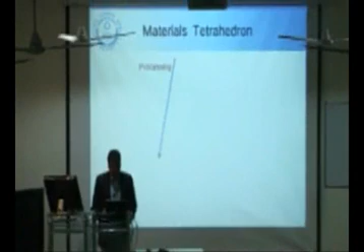So this talk is quite different from the content that is already going into the school. It's severe plastic deformation, pushing the limits of strength. Our idea is very simple: we want novel materials for novel applications.

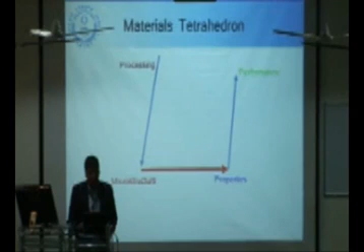So the main criteria is to enhance the strength. The second criteria is that it's a multiple objective problem, that is, we have to minimize the weight of the materials. So there's a materials tetrahedron. If you want to enhance the performance, we have to change the properties.

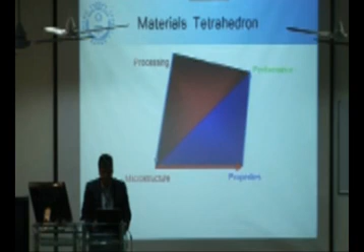If you want to change the properties, we have to change the microstructure. And if you want to change the microstructure of an already naturally available material, we have to go for some enhanced processing techniques. So that's where we come in. Our research is into the novel processing techniques by which we can change the microstructure. If we are able to change the microstructure, we will be able to change the properties, and vis-a-vis the performance will be changed. So, microstructure.

This can be done by two main approaches, either top-down or bottom-up. Our work falls under the top-down approach, where we take a bulk material and try to minimize the microstructure of the material. As I told you, if we are able to change the microstructure, we can enhance the properties.

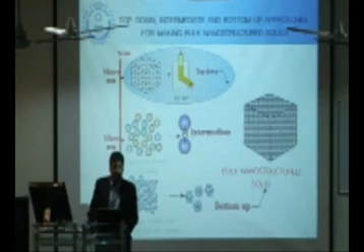So what we are trying to do is severe plastic deformation. Already many of our devices and metal forming industries use plastic deformation. The problem with plastic deformation is that change in shape takes place. So when the change in shape is taking place, we have a limitation in applying plastic deformation to the material.

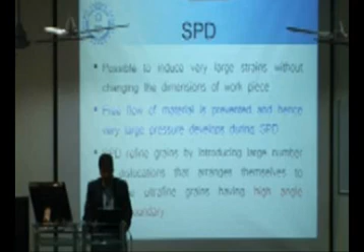So here we come to severe plastic deformation, by which we can change the microstructure. SPD refines grains by introducing a large number of dislocations that arrange themselves to produce ultra fine grains having high angle grain boundaries.

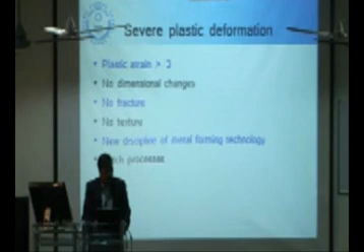What we can achieve by severe plastic deformation is plastic strain of the order greater than 3, no dimensional changes, no fracture, no texture - a new discipline of metal forming technology. But right now it is a batch process.

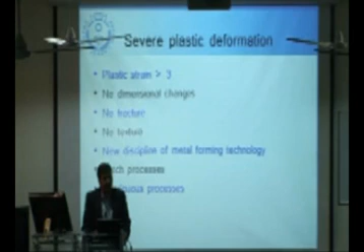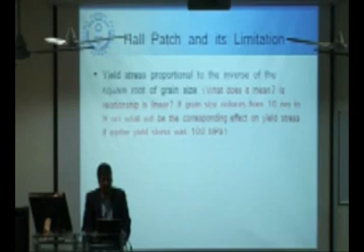What we are aiming at is to develop a continuous process in which we can apply this severe plastic deformation. This entire work is based on the Hall-Petch relationship, which states that if we are able to minimize the grain size, there will be an increase in the yield stress.

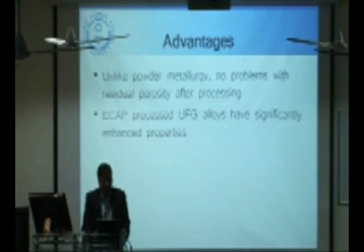So the advantages are: unlike powder metallurgy in the bottom-up approach, there are no problems with residual porosity after processing. ECAP processed UFG alloys have significantly enhanced properties. Multiple passes through ECAP are possible, since there is no change in cross-section.

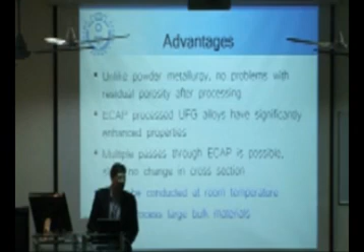Multiple passes are not possible in normal plastic deformation techniques. And most importantly, it can be conducted at room temperature, and large bulk samples are possible, which are not possible in the bottom-up approach.

So our work falls under these ultra-fine metals at the centers. In the conventional metal forming process, we take a coarse grain metal and do the traditional mechanism of plastic deformation - intensive strain hardening takes place. But as I said earlier, shape change takes place.

But in our case, we are doing little work hardening, while more strain is being introduced, and we are able to reduce the microstructure without changing the shape of the samples.

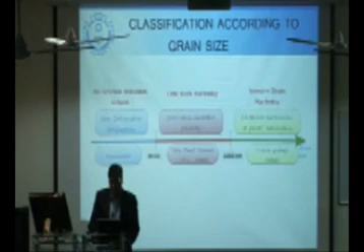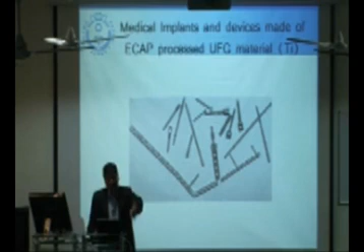The best application of this material produced by this technique is in medical implants, because in medical implants, weight has to be minimized and strength has to be increased. If we use metal processed by SPD, a good amount of weight can be reduced. The second application is in aerospace.

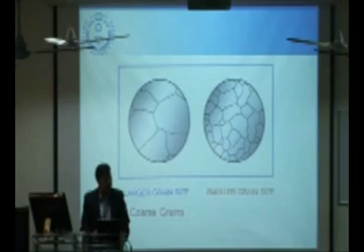So the idea is this: we are taking a coarse grain material and converting it into a smaller grain size. Our aim is to reduce the grain size over time without reducing the cross section.

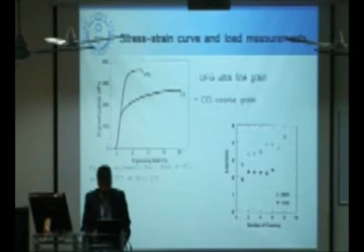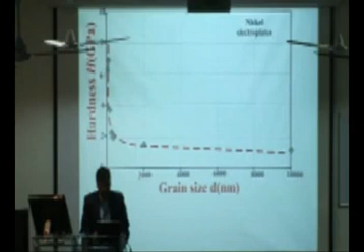These are some references which convey that ultra fine grain metal has got high yield strength as compared to coarse grain metals. As the grain size is reducing, hardness is increasing. These are well established references just to convey that as the grain size is reduced, hardness increases. This is for nickel, this is for copper.

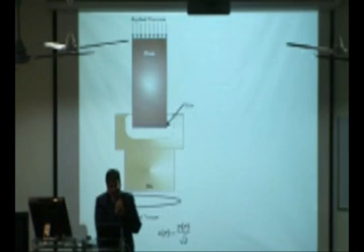Now these are the different severe plastic deformation techniques. This is high pressure torsion. In this process, only coin-size samples are taken and high strain is introduced. So the microstructure changes, and the second thing is that no cross section is changing. But this particular technique is limited to small samples only.

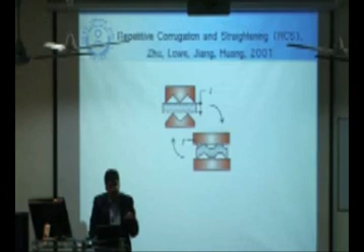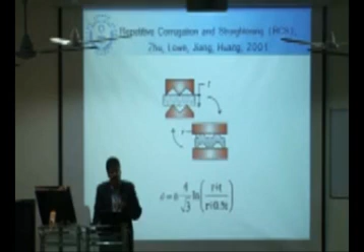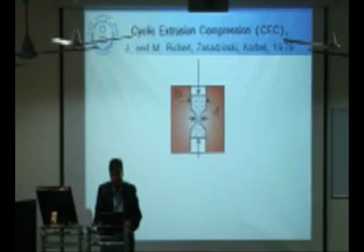This is the working of high pressure torsion. Then we have one more technique, repetitive corrugation straightening. This application is only possible for small sheet samples, where you are straightening, then corrugating, then straightening again. So over time the microstructure gets refined. Then we have cyclic extrusion compression, again with very small samples, and it is a batch process. So grain size refines as you change its deformation.

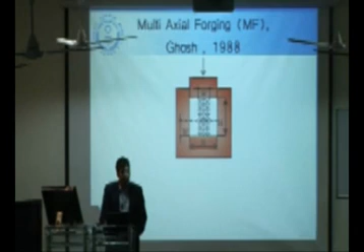Then we have multi-axial forging, which is a clumsy process because multiple blows are required. High pressure torsion I already discussed.

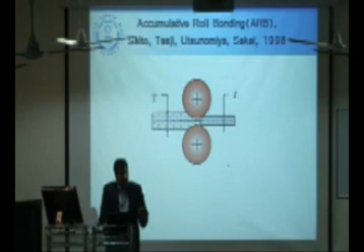Then for long samples you can take accumulative roll bonding, the ARB technique developed in Japan. Over time this works, but again it has a limitation: only up to a certain limit can the deformation be applied.

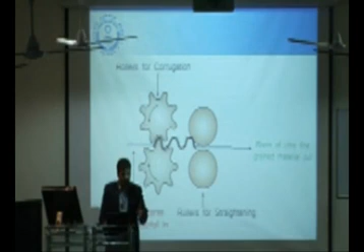Then there's repetitive corrugation straightening, which has been enhanced into a continuous process. But again, sheet requirement is very limited. As I told you, in medical implants you don't require sheets, and even in aerospace applications you don't require sheets.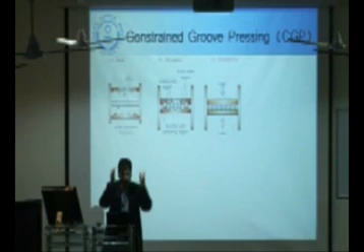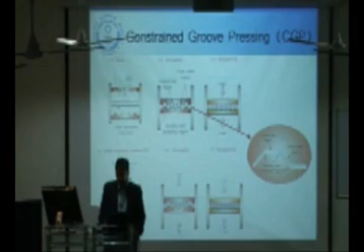Then this is constrained groove pressing, meaning the sample is constrained from all four sides and then deformation is applied. By that you are able to refine the grain size. But in this case, we don't get a uniform grain structure throughout the sample. So this was constrained groove pressing.

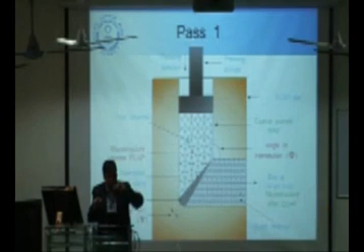Now comes the process on which we are working, and most of the community is working, that is ECAP, equal channel angular pressing. Most of the disadvantages of earlier techniques that I showed you—small samples in HPT, sheets in RCS—are addressed here, because very high strain is introduced in this area. You put one coarse grained sample in, and immediately you push it through the equal channel, which is the same size throughout.

So when it takes a turn, there is a good amount of change in microstructure, and second, there is no change in the cross section. This particular process can be repeated again and again because there is no change in cross section.

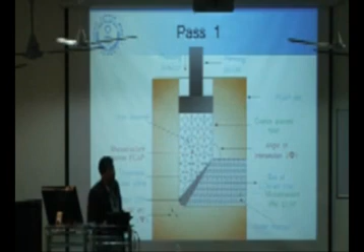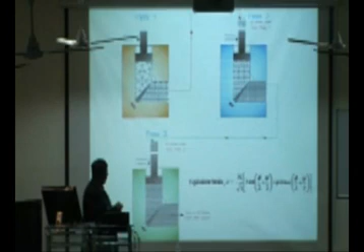These are some formulations on which this particular process depends. So a number of passes can be done: the billet is refined, then the same billet is taken and further refined, then taken again and further refined. In this way this can be done n number of times.

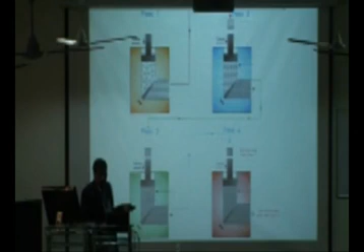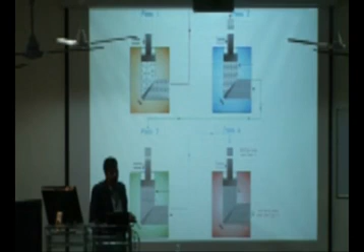It also has a limitation: reverse Hall-Petch behavior starts, as I will show you in the experiment, leading to failure. But the beauty of this technique is that the cross section remains the same, and you are able to get bulk samples in good amounts of billets of any diameter. Even rectangular cross section billets can be taken.

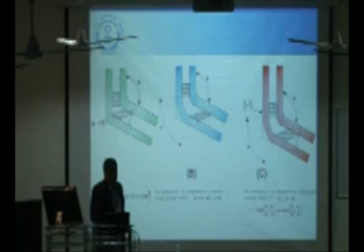This particular process has not been commercialized yet because there are a number of process parameters on which this shearing depends. The main parameters are what should be this angle and what should be this particular intersection angle. This kind of study is being done at our institute.

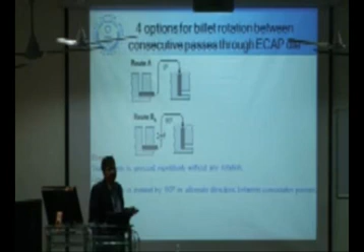Secondly, for different billets, rotation is being done to get a uniform cross section. So route A, route B and route BC, if you want a proper result, the billet is taken, then it is rotated by 90 degrees and put again, then rotated by 180 degrees and put again, if you want to get a uniform cross section.

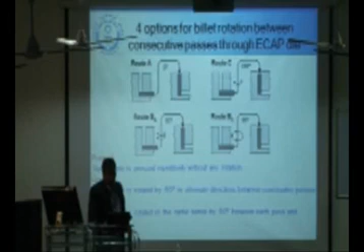So these are the dies that we have fabricated here, and we are doing experiments here. This is how this particular experiment takes place.

This is a concept shown just to convince you, by taking normal plasticine, of how the shearing is taking place and how the grain structure is being reduced over time. I'm just showing this because in the actual material we cannot see what is happening.

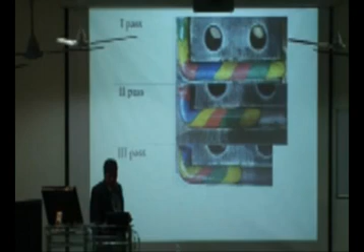How much strain has been introduced in this, how much exactly. SEM images are there, I'll show you.

There are two aspects of this work. One aspect was this: what should be the best process parameters. For that we have done a good amount of FEM modeling for all different angles and all different process parameters like velocity, friction and temperature.

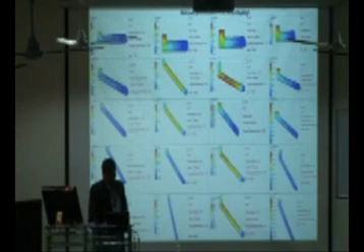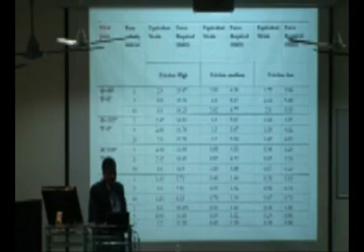These are the results for which we have done the modeling, and we are able to conclude something. These are the results for different phi, different psi, friction and velocity. And for 4 passes we have done this.

And these are the SPD results for the copper. For 2 passes you can see ECAP 2 passes, ECAP 16 passes, and ECAP 16 passes with back pressure.

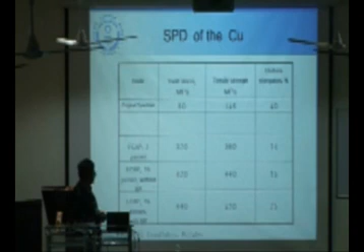But the problem is this: the technique is very good and well established, but it has not been commercialized till now. The reason is that, till date, it is still a batch process because that particular step has to be done again and again. So it is very difficult for a manufacturing industry because a good amount of time is required.

So there has to be some technique by which we can make this process continuous, so that in one go you can achieve all 5 passes. These are some of the designs that we have devised here.

If we can do this, in this case 2 passes are being done, and in this case 3 passes are being done. The 1st turn is here, the 2nd turn is here, and the 3rd turn is here.

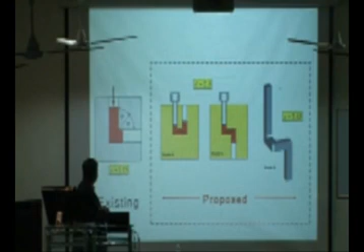So in one go you are achieving a strain rate of 3.45, whereas in the single pass case we are achieving only a strain rate of 1.15. So this particular aspect we are trying to design.

We have designed some new shapes and experimented with them. These are the FEM simulations for different shapes, showing what is the forging force and what is the equivalent strain that is being generated.

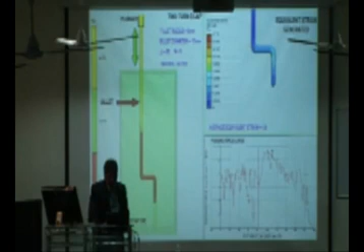Again, this particular shape can be sent through from the back, and again we can get more strain induced. In the literature till date, people have worked with only the 90 degree angle, so we have tried new sets also, less than 90 degrees - that is 45, 65 and 75 degrees.

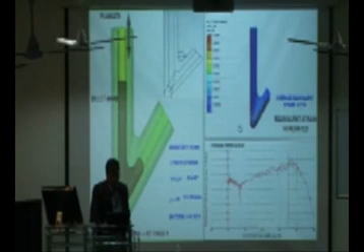In this case the results are very encouraging. I'll push through this fast.

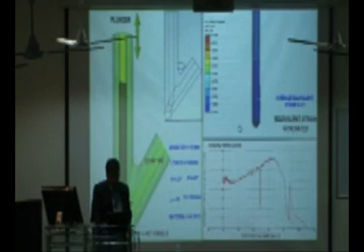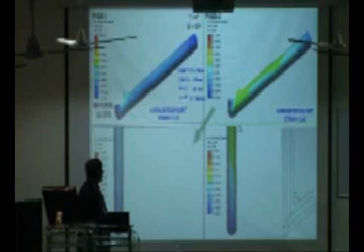I'll show you, this is the first pass, the strain is being induced. The same billet is repeated for the second pass. So the values coming are 1.75 in the first, and 3.58 in the second.

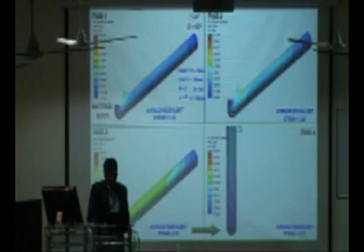In the third pass the same billet is put through, and we are getting a strain of 5.01. In the fourth one we are getting 6.12. So this particular die shape is very encouraging.

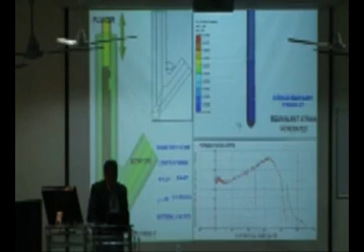So the same study is being done. This was what I was trying to show.

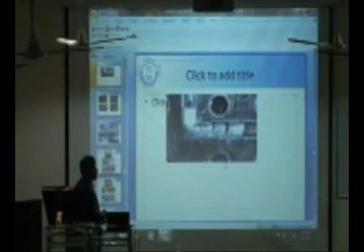This particular slide shows the reverse Hall-Petch relationship. We cannot do this for 5 passes or 8 or 10 passes. This was the result we achieved in the 6th pass, where this kind of failure was taking place, showing that after certain passes the reverse Hall-Petch relationship exists.

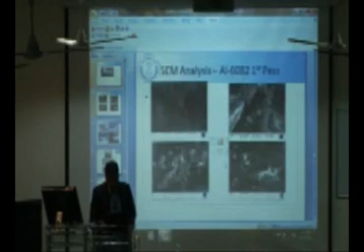So these are the SEM analysis results for 6082. You can see in our samples only, this was the coarse grained metal, this was after the first pass, this after the second pass, third pass, and fourth pass. This shows how the grain size is being reduced after a number of passes with this deformation.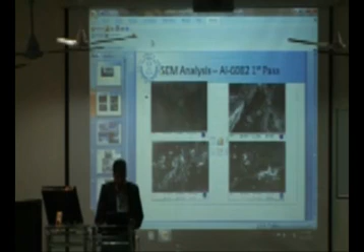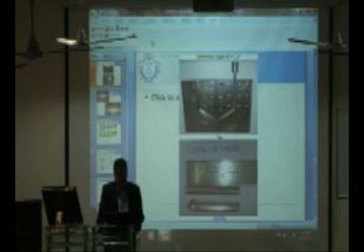So we have done studies on copper also, for different angles. These are the different angle dies - 150 degree is this, 105, 120 - but the idea is to commercialize this technique.

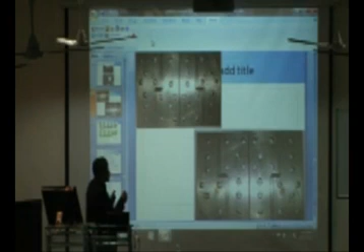So we have experimented with this 2-turn die also, meaning 1st pass and 2nd pass. It is a batch process, but the beauty of this process is that we can tilt the die and do 4 more passes without taking out the billet. We can start reversing it from here, so it goes this side and then this way - 4 more passes just by tilting the die.

So this is the new thing that we are not going to publish. We are thinking for some patent.

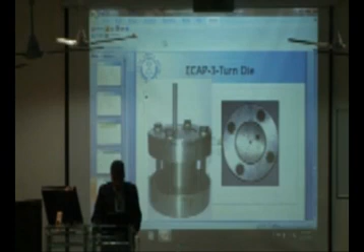This is the 3-turn die that we have developed over here. So this is the complete assembly of this. So the concept is this one.

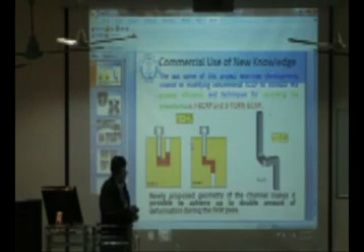So this die has been developed with a good amount of effort. It's a 2-piece split die. 1 pass goes over here, then it takes inside the 2nd turn, then the 3rd turn is taken over here, then coming out here. This has been done and experiments have gone successfully.

So this is the work that we have done at DI. We have developed this particular die. The problem with this is that we cannot put a single billet. We put the first billet over here. When it reaches here, then we put the second billet over here, and then the first one pushes it. Then again the third billet is put when the second one reaches over here. So in this way, at a time, 4 billets are always inside this.

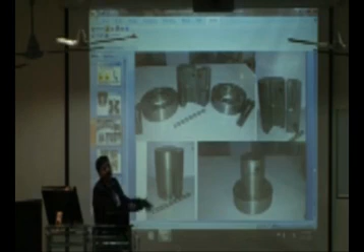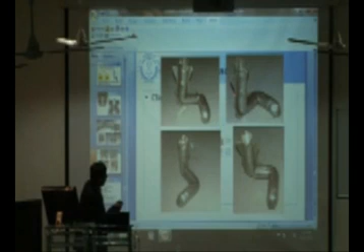So this is the sample that we have obtained from that particular setup. It is not one piece - I have just joined it by some particular aspects. So this is one piece, one joint is over here, another joint is over here. So total 4 pieces are there.

And further, what we are developing is this, a continuous ECAP process. I'll show it here. This is the novel setup that we have developed, and the fabrication is in progress.

Continuous ECAP process means if this particular kind of attachment is attached to a rolling mill, we can get nano samples, nano structured material in bulk form. This particular setup is being attached to the rolling mill. Normal rolls are coming over here, and now it is being passed in this way.

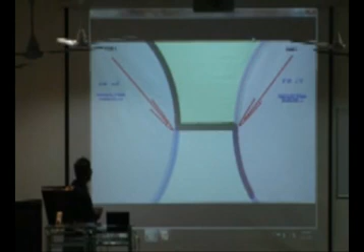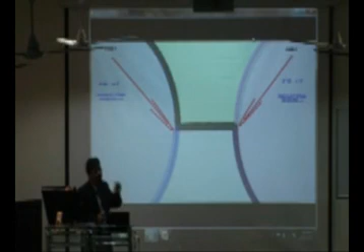So this was pass 1, strain was 2.4. Then again this is pass 2, equivalent strain is 4. Then again it is being pushed. The problem is that a very high amount of forces is required.

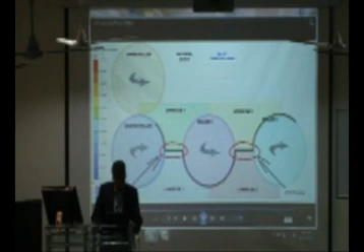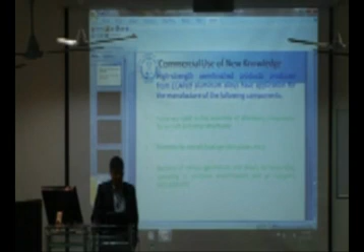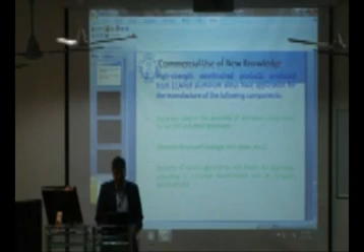So commercial use of new knowledge: high strength semi-finished products produced from ECAP aluminum alloys have applications to manufacture following components - fasteners used in the assembly of aluminum components for aircraft and other structures, elements for aircraft fuselage assembly, and sections or geometry sheets for assemblies operating in corrosion at cryogenic temperatures, as well as biomedical implants.

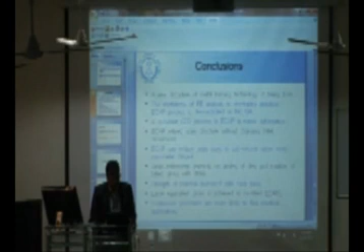I will already show it to you. So the conclusion is this: this is a new discipline of metal forming technology, meaning the normal technique is only used to refine the microstructure. For any questions, I am thankful.